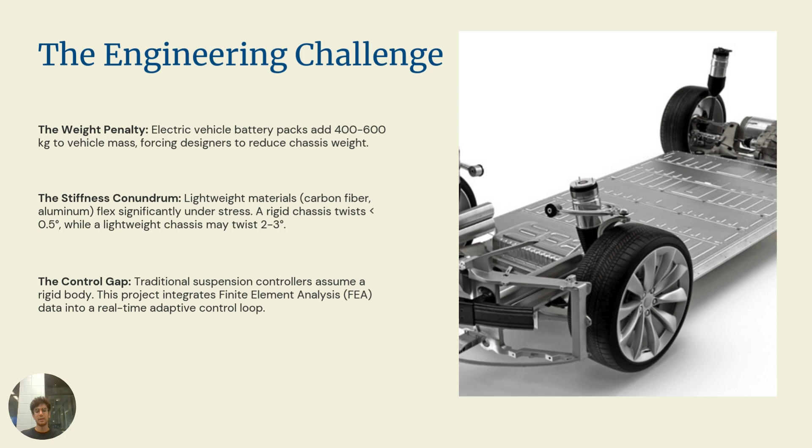So this creates a control gap. Traditional suspension controllers assume the car body is solid, as a rigid block. They do not account for this twisting flexibility. So my project solves this by integrating finite element analysis data directly into a real-time adaptive control loop.

To solve this, I first had to model the physics of the system. I chose to use Lagrangian mechanics, because it is naturally suited for handling constrained systems like vehicle suspensions very well. The most important part of the model is the potential energy equation you can see on the screen.

Usually, the potential energy just includes gravity and spring compression. But in my model, I have explicitly included the chassis strain energy as a variable torsional spring. If you look at equation 1, I set up the Lagrangian as the kinetic energy minus potential energy.

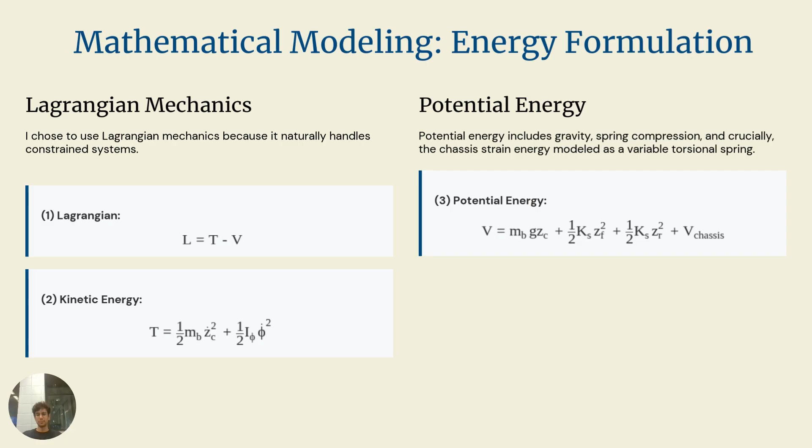Equation 2 defines the kinetic energy based on the mass and inertia. And equation 3 defines the potential energy, which now includes that special chassis term. This math sets the foundation for the entire controller design.

Now, this slide shows the most unique part of my research. Previous studies in this field usually assumed infinite stiffness to make the math easier. But here I am modeling strain energy with variable stiffness that actually changes depending on our controller input. On the right side is figure 1. You can see the CAD model of the lightweight chassis I designed specifically for this study.

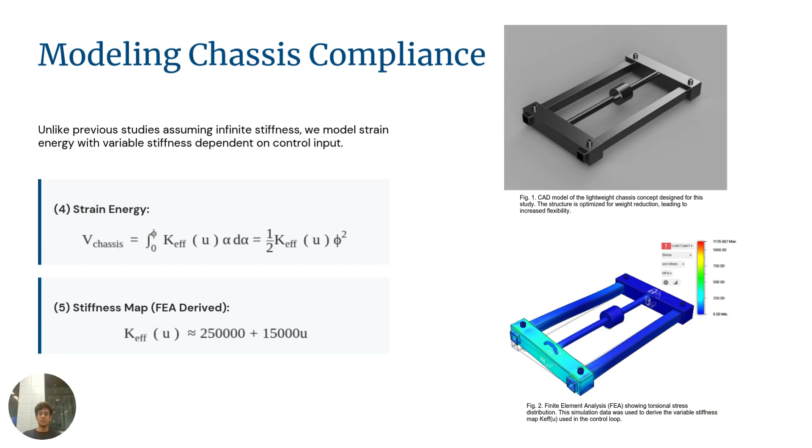In figure 2, you can see the finite element analysis, or FEA simulation, which I did in Fusion 360. The colors show the torsional stress distribution when the chassis twists. I used this simulation data to derive a mathematical formula for the stiffness map. In equation 5, the effective stiffness is approximately 250,000 plus 15,000 times the input u. This means our controller knows exactly how stiff the car is at any specific moment.

After setting up the energy equations, I applied the Euler-Lagrange equation to get the final dynamics of the system. This leads us to equation 6, which is the roll dynamics equation. This is a nonlinear equation that governs how the car behaves. Here, I is the inertia, C is the damping, which is fixed to around 2500.

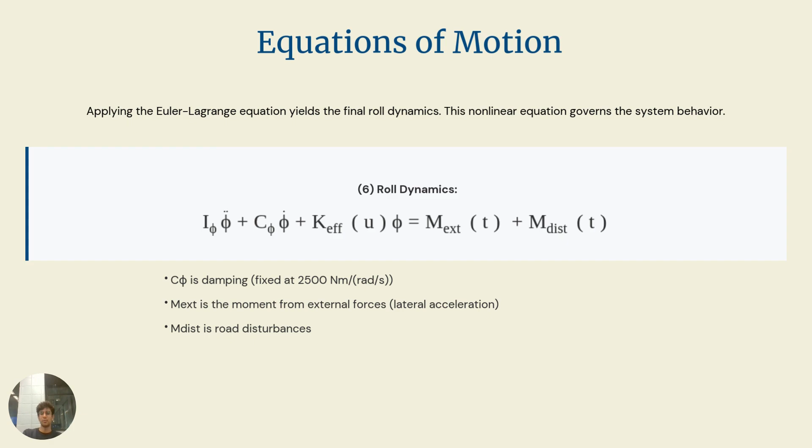We also have the moment from external forces like lateral acceleration when you turn the steering wheel, and also M, which represents disturbances like bumps or potholes. My controller needs to solve this equation in real time to keep the car stable.

So now let us discuss the control design. To manage this nonlinear system, I used a method called backstepping. I broke this down into two steps. Step one is the tracking error. Our objective here is very simple: keeping the roll angle at zero. When the car turns, we do not want it to lean over or roll. So I defined error e1 simply as the roll angle.

Step two is the velocity error surface. We need to define how far the actual velocity deviates from our virtual target velocity. This helps us calculate equation 9, which is the second error term z2. This term z2 essentially tells us how far our momentum is from where we want it to be.

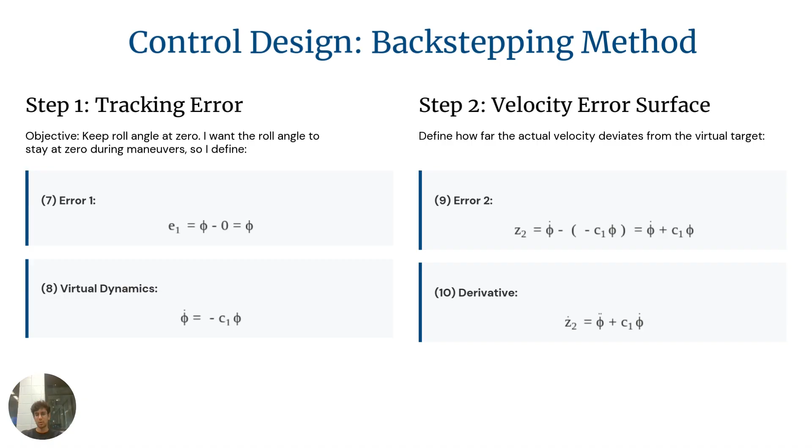So using these error calculations, I solved the ideal moment, which acts as a virtual controller input. In equation 11, you can see the formula for M_ideal. This calculates exactly how much torque is required to counteract the rolling motion and cancel out the disturbances.

But here is the trick. We cannot just simply apply torque directly to a chassis. We have to change its stiffness. So in equation 13, I calculated the required stiffness needed to generate the moment. Then in equation 14, I convert that required stiffness into the actual control input U. This tells the actuator exactly how many millimeters to move to stiffen the chassis correctly.

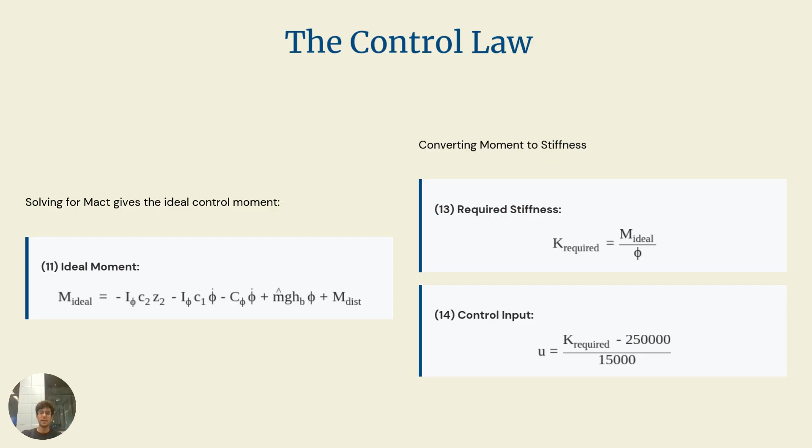Now I want to highlight two very specific logic blocks that I added to make the system very robust in nature. First is the active bracing logic. Sometimes the math might calculate that we need negative stiffness, which is physically impossible. If that happens, my controller overrides the calculations and applies maximum stiffness. It basically braces the car against the turn to prevent rollover.

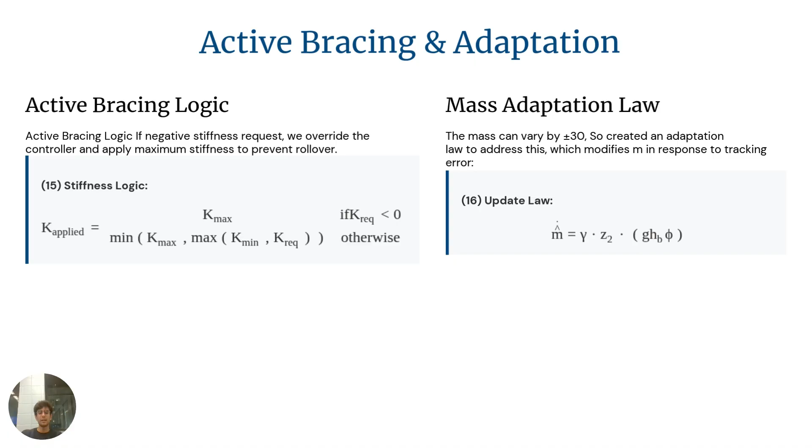Second is the mass adaptation law. In a real car, the mass is never constant. You might have passengers or heavy luggage, so the mass can vary by up to plus or minus 30%. To handle this, I created an update law, which is shown in equation 16. This allows the controller to estimate the mass m in real time based on the tracking error Z2. So the car can effectively learn its own weight while driving.

So of course, in control theory, we cannot just say that it works. We have to prove it mathematically. To guarantee safety, I rigorously prove global asymptotic stability using Lyapunov's direct method. I defined a candidate energy function V, which you can see in equation 18. This function represents the total energy in the error system.

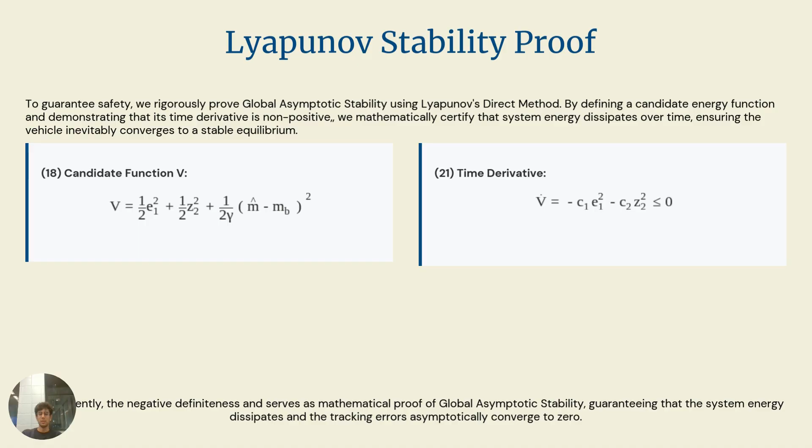Then I took the time derivative of this function V. As you can see in equation 21, the result is negative semi-definite, or less than or equal to zero. This serves as a mathematical proof that the system energy always dissipates over time. It guarantees that the tracking error will asymptotically converge to zero, meaning that the car will always stabilize.

So now let us look at the actual results for the simulation. I tested the controller using the ISO 3888 double lane change maneuver. This is an industry standard test that simulates swerving quickly to avoid an obstacle. I compared my adaptive controller against a standard passive baseline suspension. If you look at the table, the improvements are significant actually.

For the peak roll, the passive car rolled at 1 degree, but my controller kept it at 0.71 degrees. That is around 29% reduction. For RMS roll, which represents vibration and driver comfort, we improved it by around 67.4%. And the settling time was faster by 8.6%, meaning that the car stabilizes quicker after the actual turn.

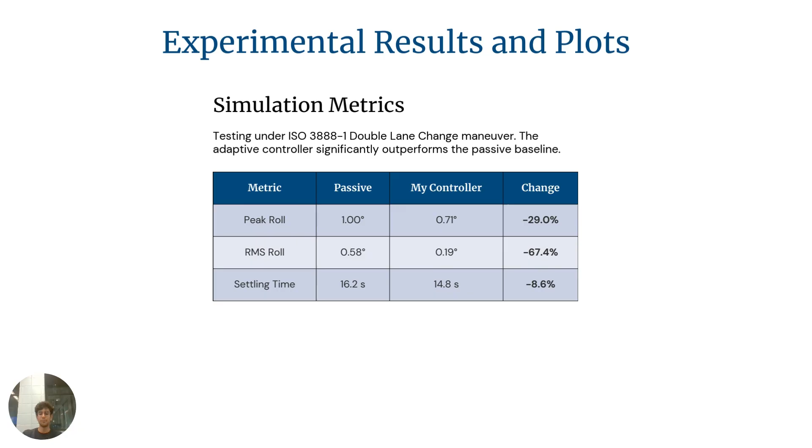So now let us move on with the experimental plots. Let us visualize this data now. In figure 3, you can see the transient response. The black dashed line is the passive baseline. You can see it oscillating quite a lot. The red line is my adaptive controller, and it is much tighter and reduces the peak roll by 29%.

In figure 4, you can see the mass adaptation working. I intentionally gave the computer a wrong initial guess of around 800 kg, while the true mass was 1200 kg. The green line shows the estimated mass as the simulation runs. It climbs up and converges toward the true value, reaching about 87.5% accuracy by the end.

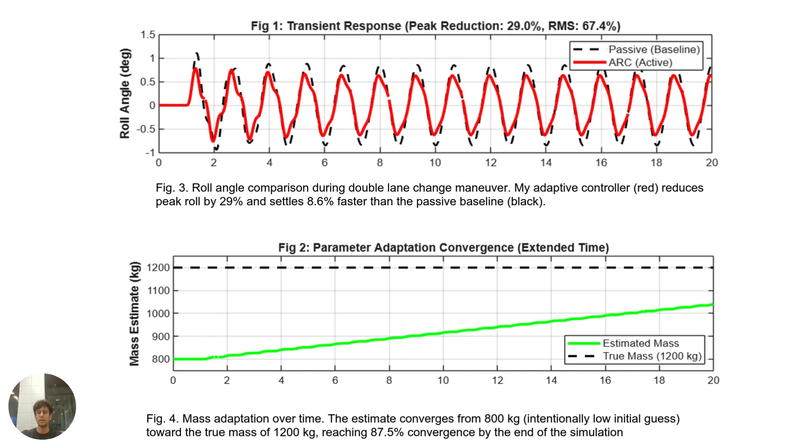So in figure 5, the blue line shows the Lyapunov function decreasing over time. This validates the math I showed you earlier. The energy is constantly dissipating, which proves stability.

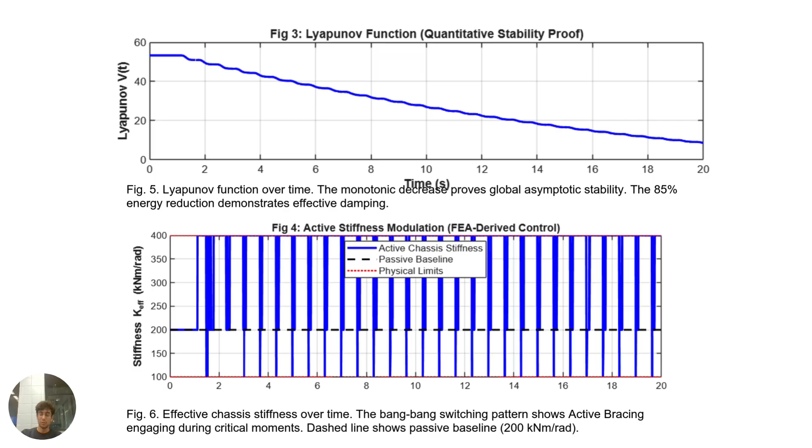And in figure 6, I also want to show you the active stiffness modulation. The black dashed line shows the passive baseline, which stays constant at 200. But if you look at the blue line, you can see a rapid bang-bang switching pattern. This is very important because it visually proves that the active bracing logic is engaging during critical moments. It instantly stiffens the chassis to the physical limit to stop the roll, exactly how we designed it to be.

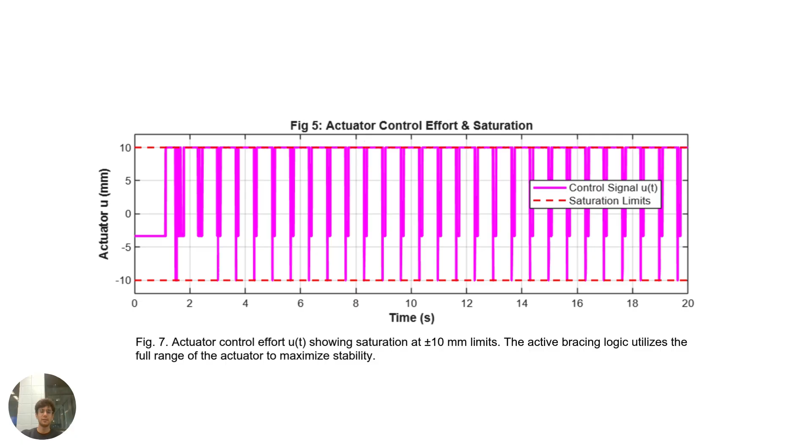Now here we have two more important plots. Figure 7 shows the actuator control effort. You can see the signal hitting the limits at plus or minus 10 millimeters. This confirms that the active bracing logic is working. It is utilizing the full range of the actuator to keep the car safe during the most difficult part of the turn.

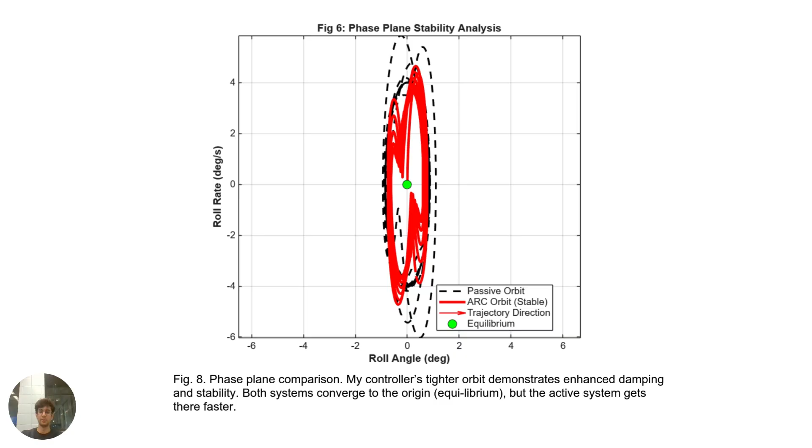In figure 8, this basically shows the phase plane analysis. The black loops represent the passive system, and the red loops are my adaptive system. The red loops are much tighter and smaller. This visually demonstrates that my controller has better damping and converges to the equilibrium point much faster than the actual passive system.

So to conclude my presentation, this project has made four major contributions to the field. Firstly, I developed a real-time controller that integrates FEA structural data into the loop. Second, we achieved excellent performance with around 29% reduction in peak roll and 67% improvement in RMS roll.